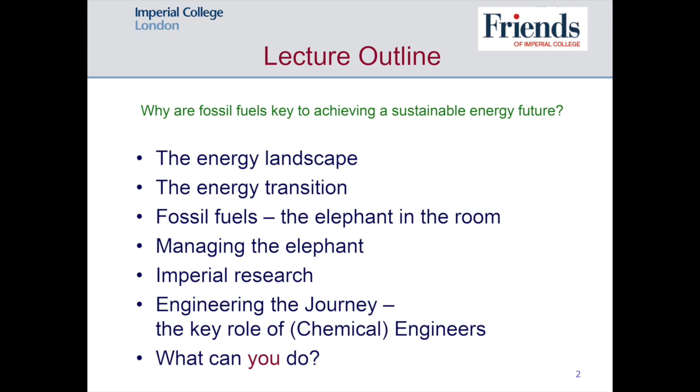So what's the energy landscape? Who are the contenders in the energy space? On the left-hand side, in the red corner if you like, we have fossil fuels, and we have the usual candidates of oil, gas, and coal.

But more recently, those are the conventional hydrocarbons. Most of you, I'm sure, will have heard of shale gas, with the controversy in the media and politically about being able to get unconventional gas in reserves that are far less permeable and more difficult to get out—shales—but with huge gas reserves there. This has transformed the landscape in the United States and has the potential to do so both here and elsewhere.

And there are other unconventional hydrocarbons. There are tar sands, a bit like the tar that we put on roads, exactly what we put on roads. So it's a very heavy hydrocarbon, almost solid-like, more nearer to coal. And as well as finding gas in shales, you can find oil as well. So there's plenty of hydrocarbon around, and I don't think shortage of hydrocarbon is going to be a problem.

Gas is increasingly favoured. The great thing about gas is that it emits about half as much CO2 as other fossil fuels, being CH4, whereas most other fossil fuels are roughly CH2 or below, with higher carbon content than CH2. So gas, although it does not solve the climate change problem, a transition to gas means you need to collect 50% less CO2 per unit of energy compared with using oil or coal.

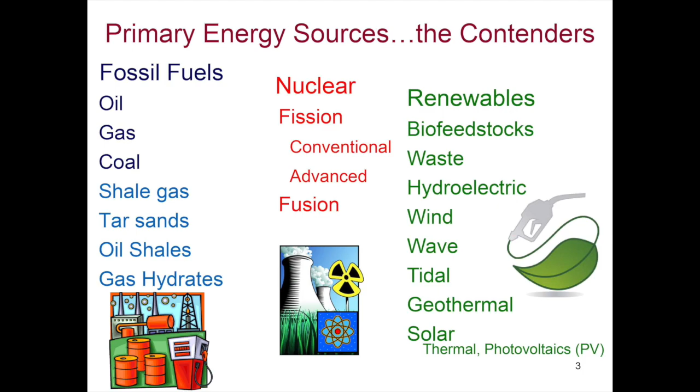Wind, again, there are limitations that will be there, certainly for onshore wind. Offshore wind, the oceans are vast, but the same limitations on capital investment as you have on offshore oil and gas.

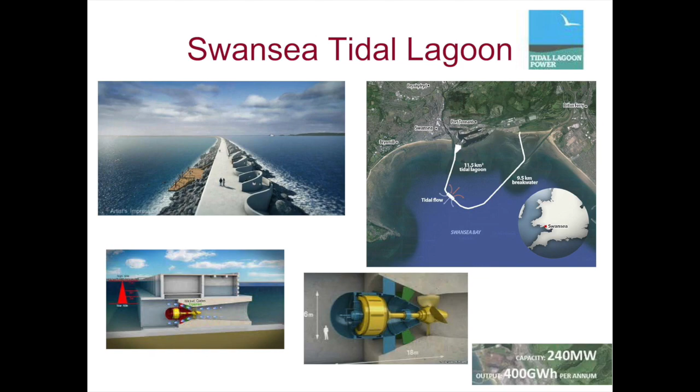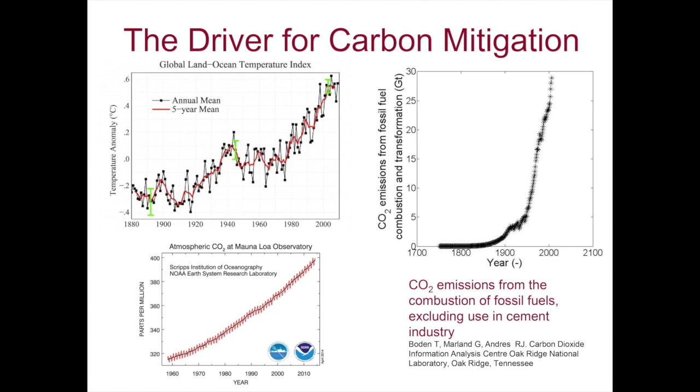That graph, incidentally, is only to do with fossil fuel CO2. It doesn't include the CO2 from industrial processes like cement manufacture, iron and steel, which is a considerable generator of CO2 as well. The consequences on the left there are that over that time scale we've seen the drift upwards of mean global temperatures and the relation of that to the increase of CO2 levels in the atmosphere, from well below 300 to approaching and going through 400 as we've gone through the millennium.

I'm not going to give a talk tonight on climate change and the causal effects - I'm going to take that as read. There's plenty of evidence out there that anthropogenic climate change is proven and that we need to worry about the level of CO2 and other greenhouse gases in the atmosphere.

Just a couple of interludes here. I'm going to show, first of all, something a bit more interesting than that graph of the increase of CO2 levels - how did that start? And if we go back to the Industrial Revolution, how did that spread?

So this video just shows how CO2 emissions have grown, and it's a 1-minute version that takes us through from the 1700s to the present day.

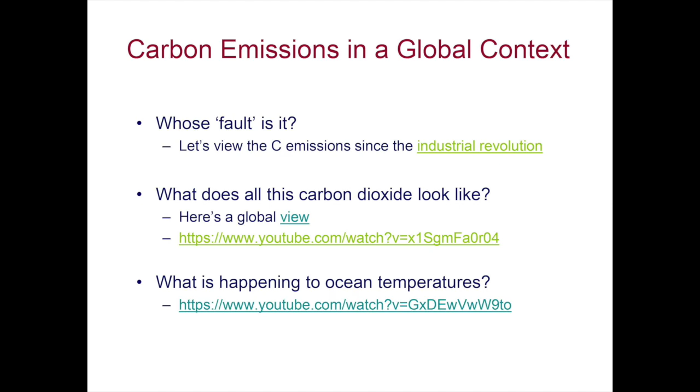Well, the other factor, of course, is that this is not a static system. It's a moving goalpost, in that there are major drivers that are going to increase the energy demand in the future.

The world population, currently over 7 billion, is going to rise so that by 2030 it's going to be probably over 8 billion, and by 2050, depending on which model you have, it's either going to be 9 or 10 billion.

And so population growth, combined with the other factor that the major economic expansion is going to be of the BRIC and non-OECD countries outside the developed Western economies, means that there's going to be an increasing thirst for energy, both from the number of people and the quality of life in countries that are developing their own systems.

So the estimates are that world energy demand is going to increase by at least a factor of 2 by the middle of this century. So not only have we got to cope with the fact that even with today's energy demand, we're not servicing that with non-carbon based energy, that demand is going to double in the next 30, 40 years. And so we've actually got to find systems that are robust enough to cope with that.

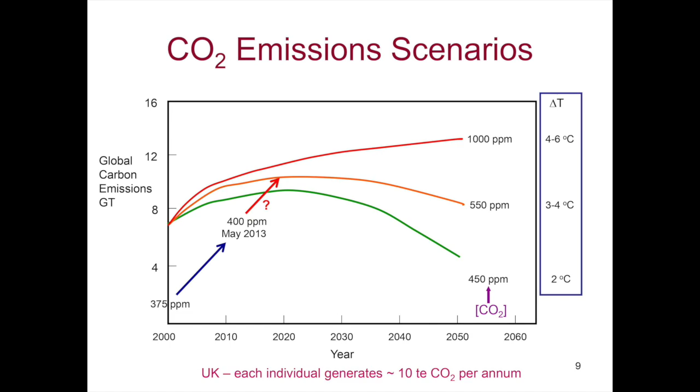Now, these are scenarios, and you shouldn't believe everything you see in scenarios because there's loads of assumptions in them. But I think the general message here, that we shall still need fossil fuels to meet energy demand—because we can't meet it all with renewables and nuclear—more than 50% of that by the middle of this century, is common to most of the scenarios.

So I think we have evidence that where there is a will to do things, it can be done. Using less energy—I'll come onto that in a minute—we can reduce our CO2 emissions by 50% of what they are now simply by using less energy and being more energy efficient. And this is the low-lying fruit that we're not actually doing enough about.

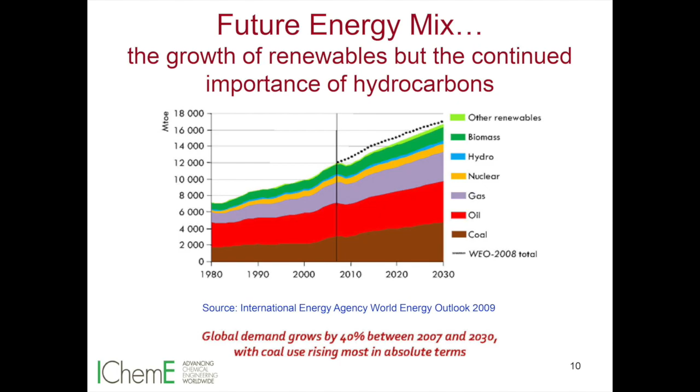So why do I say that it's going to be very difficult on these timescales to bring renewables on stream fast enough and in volume enough? Well, first of all, there's the slow rate of developing technology and improving the efficiency of these systems.

There are photovoltaics that are up in the 20-30% efficiency in the lab, but converting those to scale, it takes decades to get technology out into commercial scale. And so even though we may have embryonic systems in research and development, it's going to be a long while before we can bring those through.

And combined with that, we've got to bring the cost down so that without subsidies, renewables are comparable with fossil fuels. But we've got to add the cost of capturing the carbon from the fossil fuels—which I'll come on to in a minute—to the fossil fuels, to balance the equation. So we've got to actually compare like with like, and make sure there are economic drivers for the renewables to come through.

There's availability—I've talked about land mass limitations for biomass particularly, but also for solar and wind. And I've mentioned the major problem of intermittency, which I think is the holy grail in terms of what we need for long-term intermittent energy.

Nuclear has its own problems of safety, disposal, particularly of legacy waste and proliferation, and we know that's a major political issue. Some countries that embrace it, like France, 70-80% nuclear - if you look at their carbon footprint, it's significantly lower than the rest of the European countries because they made that choice. Germany next door made the opposite choice following the Fukushima accident. And the consequences of an accident like Fukushima are decadal in terms of actually turning perceptions. Engineers have got a big role to play, I think, to prove the safety and viability of future nuclear.

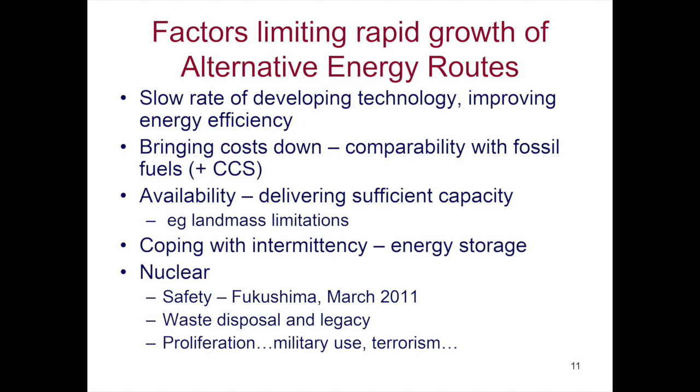Transesterification processes convert plants to diesel. These are mature, but they do compete a lot with food crops, and there's a lot of contentious issues about, particularly in the States, there have been issues about alcohol from corn and so on.

The second generation we're using lignocellulose, non-edible, either waste from crops or using fuel crops, where we use thermochemical methods to convert them into chemicals and diesel. The third generation, where we take microalgae and squeeze the bio oil out of those, that's a very renewable route, and algae are very good at reproducing quickly. But again, that's very early days, and scaling that up is difficult.

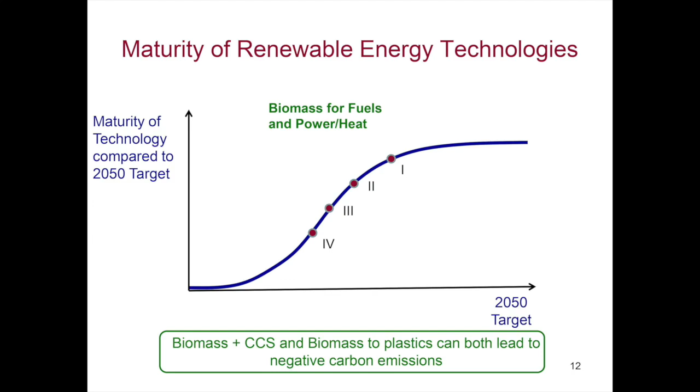So I've put more of the renewables on this curve just to show you that whilst we've got some that are relatively mature, we've got an awful lot of the things that we're putting our hopes on that are in the relatively early stages of development, and it's going to take us well into the middle of this century to actually commercialise them at the appropriate cost and volume. So what are we going to do?

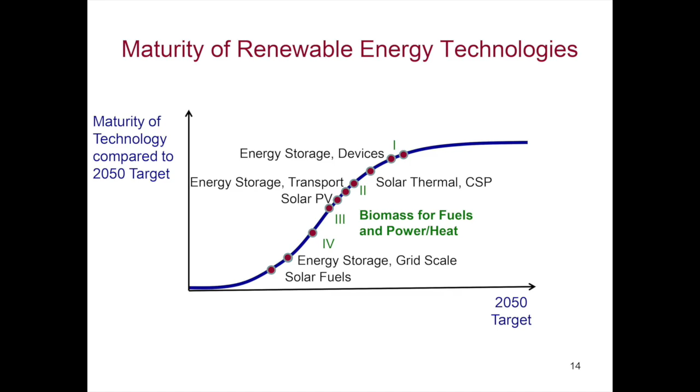This involves making our processes more efficient, but it requires individuals and governments to take decisions about using less energy and actually thinking about it in a way that we perhaps don't now.

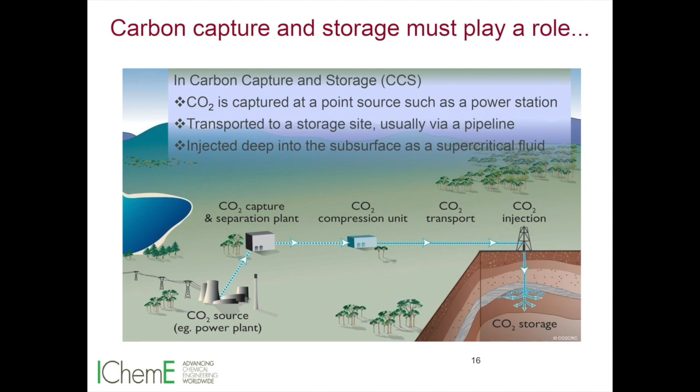So you haven't got to remove all the CO2 by carbon capture and storage, you've just got to remove that 10 gigatons per annum. We'll see whether that's a challenge or not in a minute. There's no way we can continue to use fossil fuels on the timescales I'm talking about without taking the carbon out of the system.

The way carbon capture and storage works, I'm sure most of you will have heard of it, or may even know some of the details. Basically what you do is capture the CO2 from the gas streams emitted from power stations and industrial plants, with absorption in liquids or adsorption on solids, and then you need to extract it and transport it, ideally by pipeline. So we have a CO2 grid, just as we have a gas grid and an electricity grid now. You take that to wherever you have these major sinks, typically offshore in the UK and the North Sea, depleted oil and gas wells.

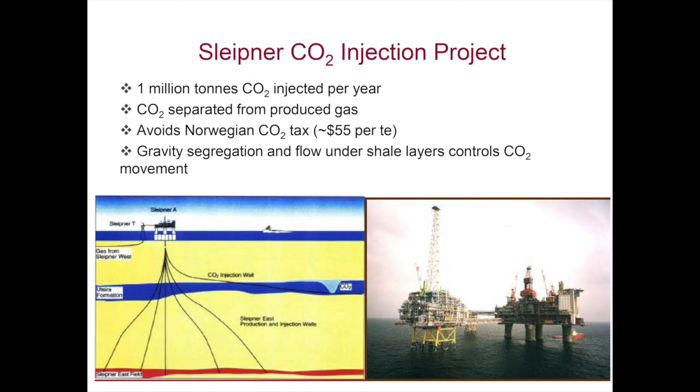There is one commercial project that was launched about 18 months ago, and that's in Saskatchewan in Canada.

It's based on a coal-fired power station capturing the CO2 from the flue gas. About 1 million tonnes of CO2 are stored per annum, as in the Sleipner project in the North Sea. That's equivalent to removing about 250,000 cars from the road. So these are making a significant impact.

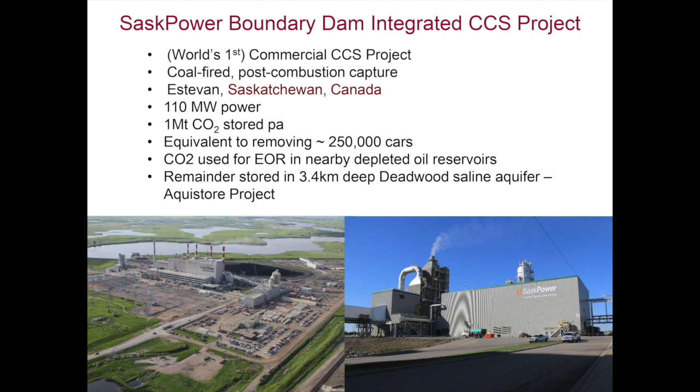This is aided by the fact that you can use the CO2 for enhanced oil recovery on nearby reservoirs to get more oil and gas out of the ground. And that is one reason why this can be commercial, whereas other operations, in the absence of a carbon tax or subsidies, find it very difficult to be commercial.

So there's controversy about CCS. Is it, as Greenpeace say, just simply an excuse to continue to use fossil fuels further? Or is it an inconvenient truth that we can't continue to sustain the quality of life that we have, and the quality of life that the developing world needs, without continuing to use fossil fuels? The consequence of that, therefore, is we have to develop CCS at a commercial scale.

And it's not only altruistic, there are real economic consequences. This is a report issued by a cross-party committee of MPs, and I rather like the cover of the report I've reproduced there, because into the word electricity they've managed to fit all the things about energy we've been talking about, and storage is right at the top, as the E of electricity.

But this report shows that if we delay deploying CCS in the UK, then the costs to the nation by 2050 are of the order of 30 to 40 billion pounds. And the reason for that is at least twofold. One is that if you don't use fossil fuels with CCS, you have to deploy renewables while they're still very expensive, unless you subsidise them a lot.

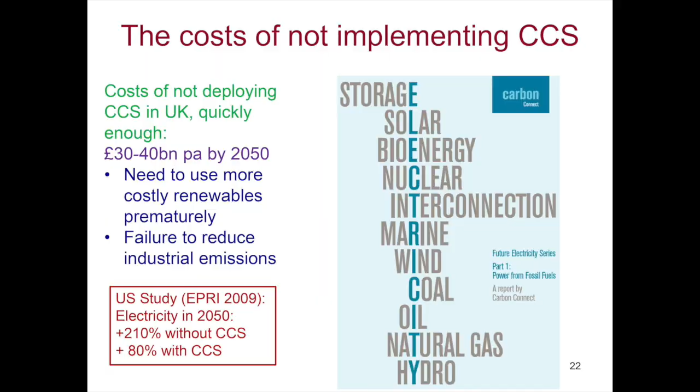So we have this short-term view of CCS. What about the long term? Well, one thing that we're working on here, and could be a possibility, but it requires a paradigm shift.

If we're going to continue to use fossil fuels for most of this century, as I believe we do, then the way we currently do them is very inefficient. We bring everything up to the surface, lose a lot of energy doing that. We use a lot of energy to transform the oil and gas into things we want, which generates more CO2. Then we capture the CO2 and then we pump it back down again.

So why don't we, in fact, do a lot of this processing in the subsurface, and all we bring up to the surface is what we need, which is low-carbon fuels like hydrogen or methane, electricity and heat, and syngas, carbon monoxide and hydrogen, from which we can synthesize most of the chemicals and fuels we want, and we leave the heavy stuff, and we also leave the carbon dioxide in the subsurface.

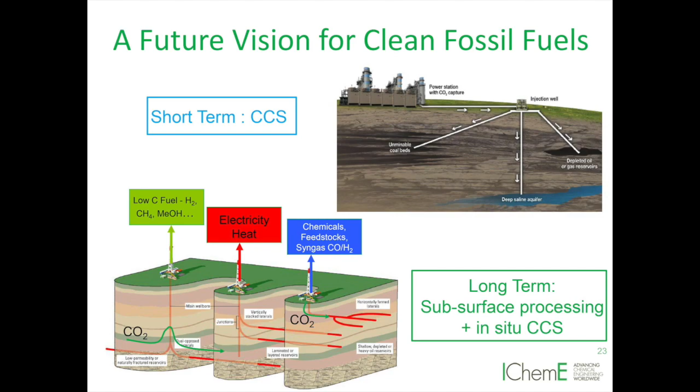But that will take us several decades to perform. If we're going to continue to use fossil fuels, I contend that what we do now is not the best way to get it out of the ground. So, how do we use fossil fuels more sustainably?

Let's address the resources issue first. I don't think we're going to run out of fossil fuels, even if we continue to use them till the second half of this century. And the cartoon character there is Fred Flintstone. Just as the Stone Age didn't end because we ran out of stone, the fossil fuel era will not end because we run out of fossil fuels. It will be because of other factors - economics, politics, regulation - that drive it in that direction.

So what we've got to do is eliminate CO2 and greenhouse gas emissions, particularly from central generation facilities, and engineer the environmental impact so that fossil fuels have a similar impact compared with renewables in terms of carbon release. In the meantime, I think we can regard this as a low or zero carbon bridge to renewable energy. It's not displacing new renewable energy - we should continue that as fast as we can. But it is buying us time that, unless we want to revert to an agricultural economy, we have the time to actually make that transition. This is why I think fossil fuels are so crucial, used in the right way, to enable us to make this transition.

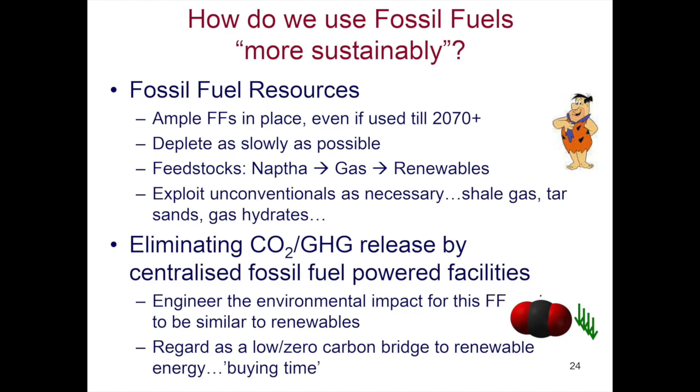So, the nuance of... I posed a question at the beginning of how do we manage this transition. This slide, in a way, summarises my view of how we get there. First of all, we use less energy. And if possible, we use 50% less energy - that's the low-lying fruit of the lemon tree, is it? I don't know what the fruit is.

But the second thing is that, while we continue to use fossil fuels, we use more gas and less oil, and as little coal as we can, but we can make a decision not to use coal. We've closed down 3 coal-fired power stations last year in the UK, but the same is not true in other parts of the world, and we can't expect that to happen. So we've got to go to the third option: capture as much of the CO2 as possible. And if we use gas, we should take the CO2 from gas as well. Gas is not an excuse for not capturing the carbon. We need to take it from the gas as well as from coal and oil in petrochemical plants.

We should increase nuclear. I believe nuclear has a large role to play in the future, but it's not a fast option, and there are issues with proving the new technology as well - we have that in this country as elsewhere. Meanwhile, with fossil fuels, we should actually mount the transition to a portfolio of renewable energies as soon as possible. But I hope I've indicated that this is going to take us 50 years at least, and it's going to be very country-specific, depending on natural resources and policies.

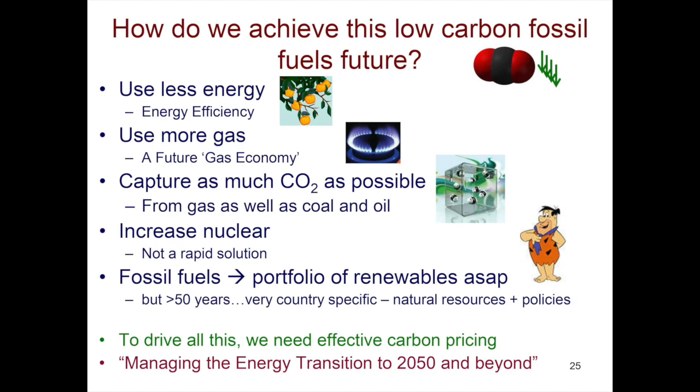And whilst the European carbon trading system has not been very effective, at least it exists. And that may be one of the unintended consequences of Brexit, that we're not part of that. We do have our own carbon floor price to add on top of the European trading system, but that's been capped till 2020 at, I think, £18 a tonne, which is nowhere near high enough to drive people to have to bury CO2 rather than release it.

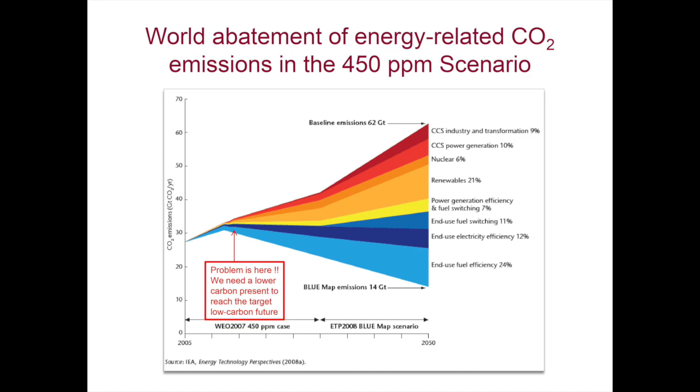So I go back to my CO2 emissions plot, where we said, what are the ways that we can actually take CO2 out of the system? Just because 2050 is the target, it doesn't mean we've got decades to do this. The problem starts now. Unless we actually start to act now, this will be a moving goalpost, and the amount we need to take out by CCS, if we don't introduce renewables or do energy efficiency rapidly enough, will go up. So it's absolutely critical that we make progress.

Well, how are we doing on carbon emissions? In 1990, 2.39 tonnes of CO2 per tonne of oil equivalent energy used in the world. Look at 2010, 2.37. Within the noise, we hadn't made much progress. With the US using shale gas, there's been a period where atmospheric levels of CO2 have been increasing more slowly because of the increased use of gas, and that's encouraging. It may be a foretaste of the benefits of using gas, not short term, but maybe longer term, as a way to keep things down.

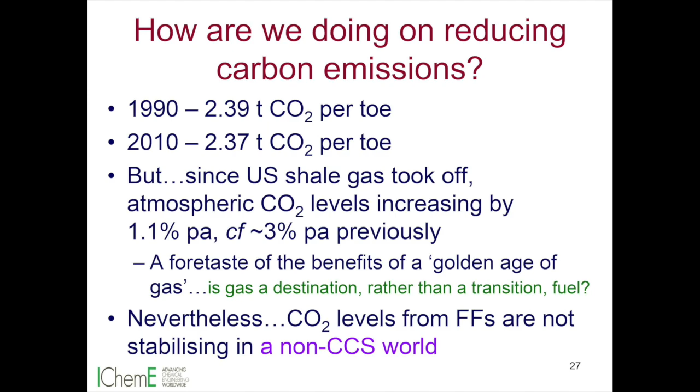But I contend that in a non-CCS world, we haven't been very good, since we're still continuing to use fossil fuels at enormous levels. We're not stabilising the carbon emissions. There is a chink of light.

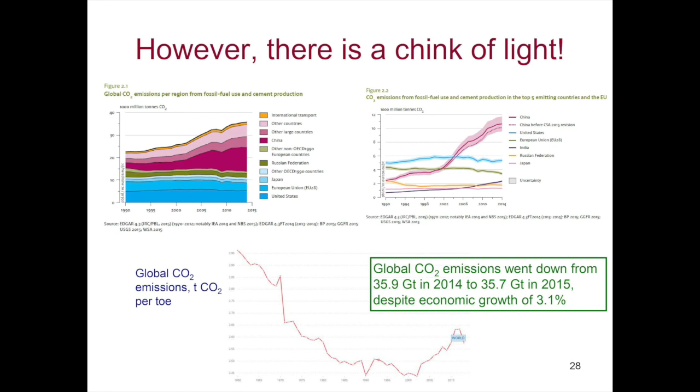Coming back to CCS, can it solve the problem of taking out this 10 gigatons of carbon dioxide by 2050? We currently have about 50 CCS projects worldwide, some demonstration, going from a few hundred kilotons per annum to a megaton, 1 million tons per annum. If we're to meet that target, by 2050 we've got to put in 3,000 projects at the megaton scale. So you can imagine the rate we need to put them into place, 100 projects a year after 2020, in order to meet that.

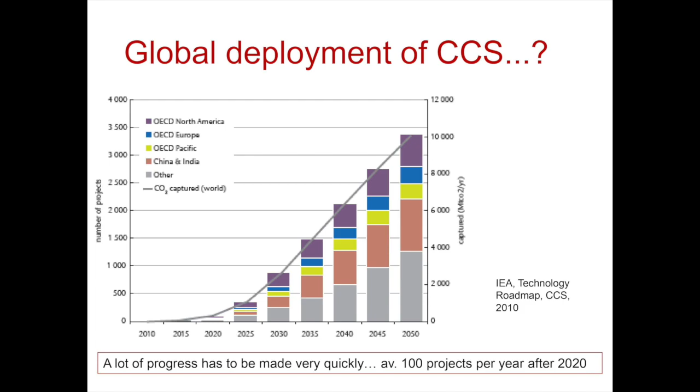And so whilst there are megaton projects that are now being carried out technically very effectively, I come back to the fact that until we have a carbon price that drives this, waiting for the market conditions is like fiddling while Rome burns. I just want to digress for a few moments to say a few words about the UK.

If you go to the 2015 projections from what was DECC and is now BEIS, the new Department for Energy, the top shows that renewables and nuclear up to 2035 will increase to about 50 million tonnes of oil equivalent for energy. The coal in the middle will decrease significantly and almost become extinct, whereas oil and gas at the bottom are not going to increase, but will remain fairly steady over this period at a level still significantly about double that of the renewables and nuclear.

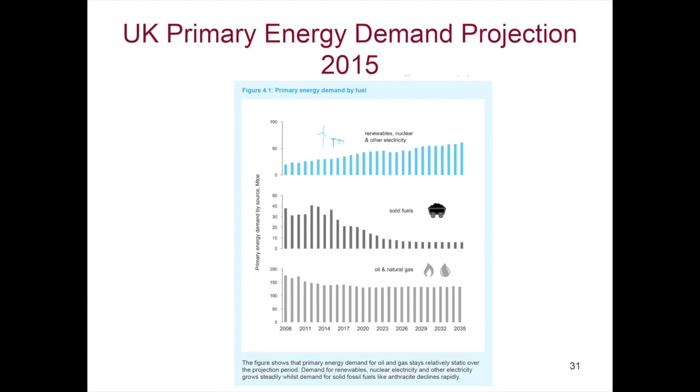Now, there has been some encouraging news in terms of the shape of our energy mix, in that if you look back at 2016, this was the first year where wind provided more electricity for us than coal. Wind was 11.5%, coal was 9%. 3 coal power stations were closed down, and gas has increased to 45% of our electricity mix. You can see on the graph at the bottom that our total energy consumption is going down, so we are doing something about energy efficiency and more efficient use of energy and less use of energy.

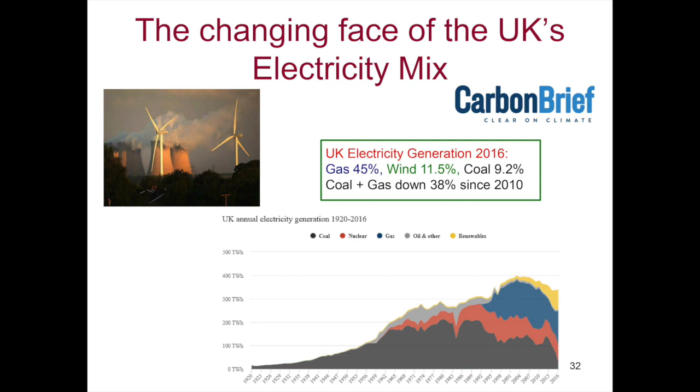And this is the carbon budgets that the UK has set itself. We're fairly unique in having a climate change act that embeds in law that we will actually reduce our carbon emission levels by 80% from 1990.

You can see on the right there the target of 120 megatons of CO2 equivalent by 2050, and the different staging posts of the budget. The solid line is how we're doing - so far, so good. But if you look at how we're going to go from where we are now, certainly with the next carbon budget to 2050, we've got to continue to use fossil fuels to meet our energy demand. With no CCS, we're not going to get there.

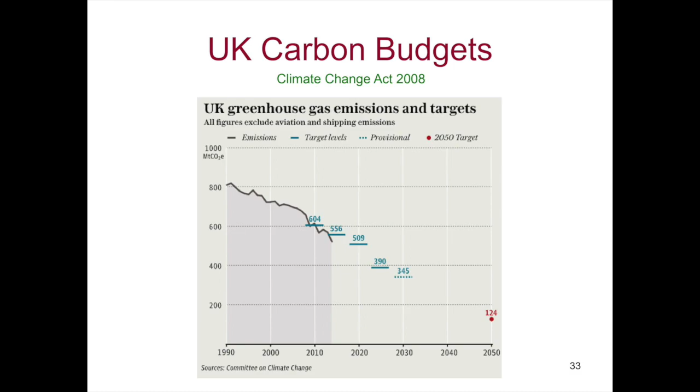We did have a competition, 2013 to 15, with two final contenders: the Peterhead project, and the White Rose project, which was going to put stuff into an aquifer in the North Sea from a coal-fired power station. Both had been through the design stage and were approaching commissioning when the Chancellor removed the funding in his autumn statement in November 2015. So the UK is in a position where, having had two tries at a competition, we still haven't managed to get this technology to the level where it's semi-commercial.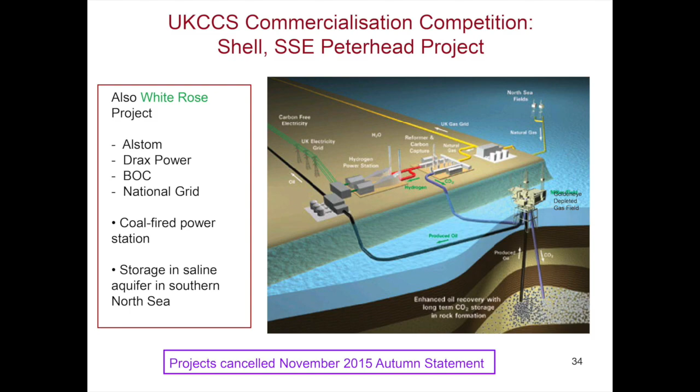However, one lives in hope. This is a project some of you may have heard of. The latest idea is that since 30% of our carbon emissions come from cooking and heating in domestic and commercial organisations, there's a plan to use hydrogen for heating. Hydrogen can be generated from methane gas reforming, where you produce hydrogen and CO2, and take the CO2 off and store it. So if you're going to produce hydrogen from fossil fuels, you need carbon capture and storage to get rid of the CO2. You can produce it from electrolysis of water, but if you're not going to generate more CO2, you've got to use renewable electricity to do that.

So hydrogen is not the universal solution unless you think of how you're going to get it. But Northern Gas Networks, a gas provider in the north of England, with partners, has got this project planning to use Leeds as the test bed for providing hydrogen for domestic heating, using the existing gas grid. All the appliances will have to be modified, but that's no different than what happened going from town gas to natural gas 50 years ago. So we've been through the experience of what we need to do there.

It'll be very interesting to see whether this actually does get sufficient funding to be carried out, and leads to be the pilot as to whether hydrogen combined with offshore storage, where the carbon dioxide is stored offshore, is the way forward. So I'm running out of time, I'm not going to dwell too much, Chairman - I'll finish shortly.

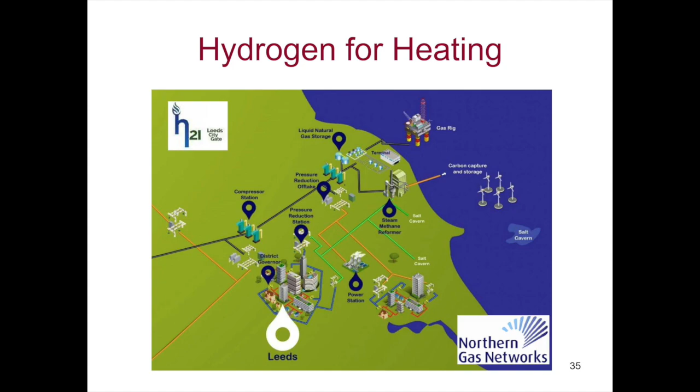My own research crosses the energy landscape. I'm very passionate about making CCS work, and this Carbon Capture and Storage Centre, QCCSRC, is understanding the fundamental science and engineering of the injection processes into sandstone and carbonate reservoirs - the ones in the Middle East, the North Sea, the Gulf of Mexico - and how we can optimise that process and ensure the CO2 stays there more or less forever.

I'm interested in how we continue to use fossil fuels, but going beyond CCS to how we actually leave most of the waste in the ground and just produce the high-value stuff like hydrogen and methane. I also do some work using cyanobacteria and green algae, which are very good photocatalysts, to convert water into hydrogen using sunlight. Currently we produce a few litres a day, so that's got some way to go to meet the demands of Leeds.

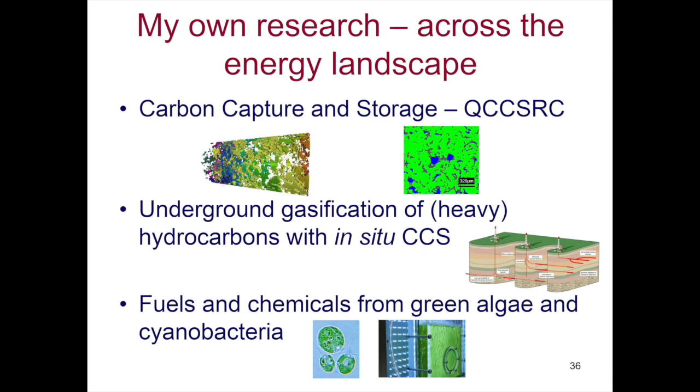But we do all this under the umbrella of the Imperial College Energy Futures Lab, which is a one-stop shop for all the energy research we do, with hundreds of researchers across different departments and institutes, and about 20 research networks shown there that look at different parts of the energy portfolio, all the way from oil and gas, carbon capture and storage, to photovoltaics, biofuels, wind and hybrid vehicles and so on.

So the Carbon Storage Centre that I helped to found, and was director of until a couple of years ago, is funded by Shell and another partner - those of you who are football aficionados will recognise Lionel Messi, sponsored by Qatar Foundation, who are one of our sponsors of this. So they have good taste.

This is a 10-year programme, $70 million, unusual for an industrial-university programme in that we have 10 years to actually do research, try it out in the field, see where you didn't do the right research or got it wrong, and iterate round the loop with our partners. We're very grateful to them for the trust they've shown in us in understanding particularly carbonate reservoirs, the reservoirs you find in the Middle East. This slide shows the variety of activity and the number of staff involved so far. We rather like our strapline, which is putting CO2 in its place.

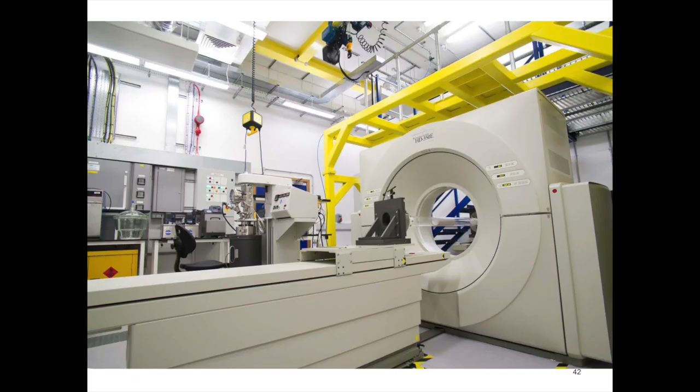A lot of what we do uses imaging, so we use CAT scan imaging. This is a medical CAT scan that has been adapted to look at oil and gas and carbon dioxide in rocks. We can also do it at the very small scale, looking at the pore size scale, of the order of microns, to see what's happening in the actual pores of the rock, rather than on a longer scale.

The way CO2 is trapped in the rock, the blue there is supercritical CO2. It's supercritical, above its critical point, so it behaves both as a gas and a liquid, in that it's got the density of a liquid but the viscosity of a gas, so it's very easy to pump in there. If you then flood it with water, you actually trap the CO2, as those globules show there.

This was the first micro-CT observation of trapped CO2 in a rock, about 10 years ago now, that we did. One needs to understand what is it that keeps the CO2 there. Well, the thing that keeps it there is the interfacial tension between the CO2 and the surrounding brine or water. You have a cap rock that provides your ultimate seal, impermeable so it can't come out, but you have this capillary action that keeps it in there, and over time the CO2 dissolves in the water or brine and, being denser, sinks to the bottom of the reservoir. So if you like, you have belt, braces and suspenders as mechanisms for actually keeping the CO2 in there for centuries.

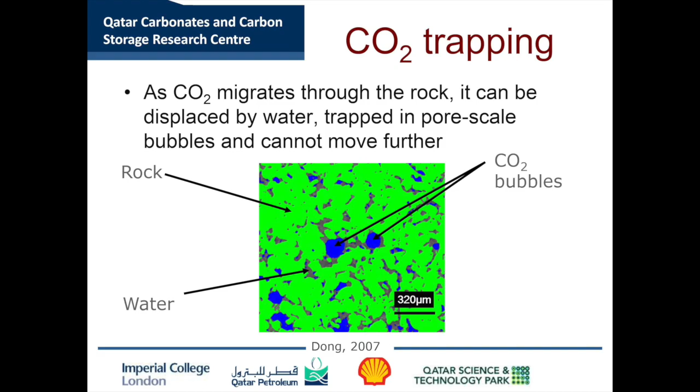Here are a couple of my PhD students who were studying these droplets of supercritical CO2 falling into the brine at high temperatures and pressures. From the shape of those droplets they can deduce the interfacial tension, which then enables us to predict more reliably how the CO2 is going to get trapped in these reservoirs.

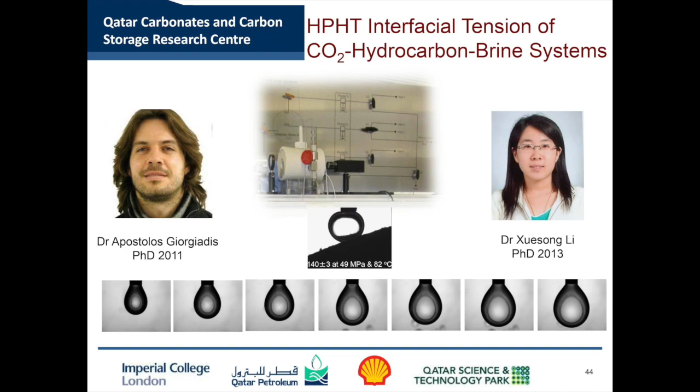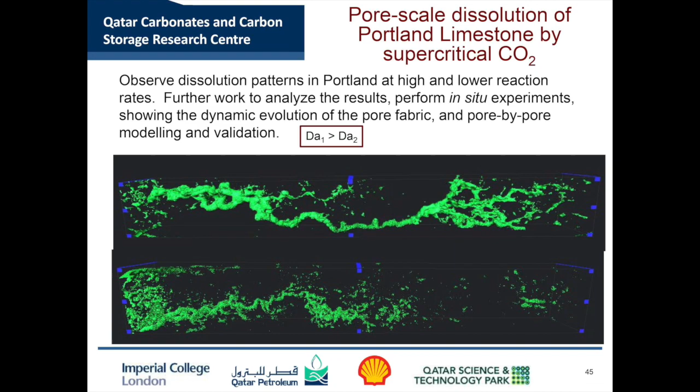So that's just one example of where we're making measurements that we can then put into models to make these processes safer. And I should recognise a whole host of people who do all the work—I just talk about it.

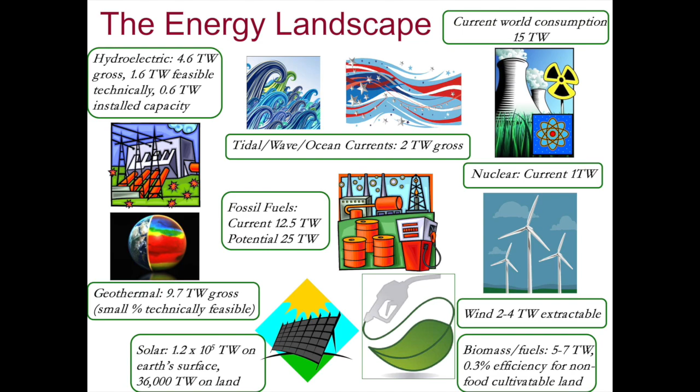So I come to the end of my talk. I've overshot my time, even though we started late. I won't say too much about my final section, about what we do to get there - how we go from the current energy landscape of 15 terawatts to the future landscape where solar is at the middle, fossil fuels haven't disappeared, but everything else is still part of this portfolio. The way we engineer that journey is, I think, not to leave it to governments, but engineers are key - and I'd say this as a chemical engineer, that chemical engineers are very important in this - but there are 3 stages.

Planning the journey, given we've got all these options for energy - what are the different journeys across this landscape, linking together different energies that are going to be the most cost-effective, the most carbon-effective, and produce the volumes of energy that we want.

That's going to need some - we've got lots of solutions at the moment, but it's also going to require some innovative technical solutions that enable us to accelerate that journey and reduce the cost. The third thing is public engagement, both with the public and with policymakers and government, to convince them of the urgency and of what systems we need to put together to actually enable us to get down that journey.

I have some examples of the technical challenges engineers need to address that I won't go into. But the quality of life we're trying to influence - we've got technical solutions in the middle, but unless we can actually influence policy frameworks, economic drivers and public attitudes, we're likely to stay stuck for a long time because we're not going to get a consensus.

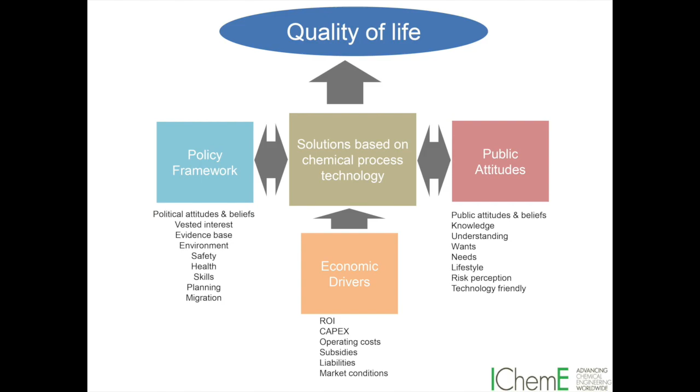We've got to have persuasive arguments that move us forward. So I ask, how serious does the problem have to get before the engagement is sufficiently effective? We need to be better as scientists and engineers at communicating in the language of policymakers, regulators and economists, rather than just the language of scientists and engineers.

My statement at the bottom is that we are sleepwalking into a catastrophic climate change future. I hope I've convinced you that the timescales are so critical that we are not moving anything like the speed we need to address this.

So I encourage everyone, whatever your situation, to speak out and tell the world that urgent action is needed to address climate change mitigation, and to recognise there's no free lunch. This will cost us. If we're looking for solutions that are cost neutral and don't mean we have to pay for the environmental damage we're preventing, then we, governments, and people across the world are kidding themselves.

So I end up with, what can you do? I hope you go away thinking, perhaps if you haven't before, a bit more about engaging in the energy debate - it's a very good dinner or pub conversation. You can play your part in energy efficiency. Try setting yourself the challenge of saving 80% of your 10 tonnes of CO2.

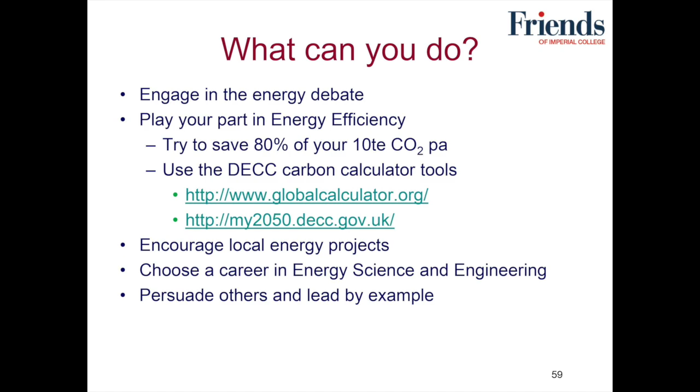Encourage local projects and local initiatives for things like local heat systems and local power systems - they're very well worth pursuing. Those of you in the early stages of your life and career, consider a career in energy science and engineering. If you want to change the world, this is an area that desperately needs you. So persuade others and lead by example. Thanks for your attention. Thank you.